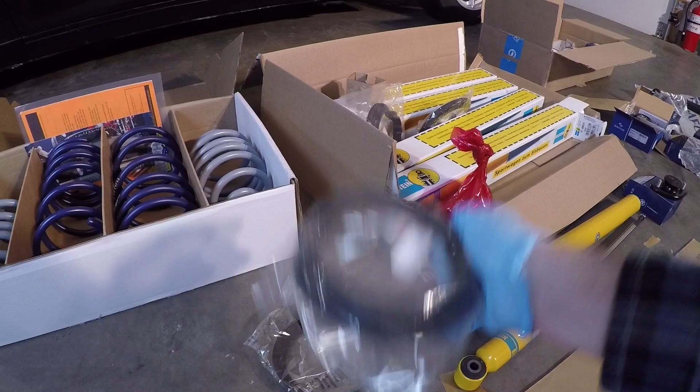Down here we have brand new Bilstein shocks - these are the B8 shock absorbers and strut cartridges for the BMW E30, for if you're lowering your car at all. So even though I'm just dropping it an inch, I'm still going to put the lowered style struts and shocks on this car. That's because when you have a lower spring, your shock absorber needs a shorter breadth of dampening range. The shafts here are actually shorter than stock, which means when you raise the car, the suspension droop won't be nearly as much.

Now these are pretty high quality struts. Altogether for the kit it was about $460 or something like that. So it's not cheap, but hopefully they'll last a long time. Not only will they ride better than what's currently in there, but they'll also look great when you take a look under the car. Moving down the line here, these are the top shock mounts for the rear shocks.

These bolt into the rear wheel well. I've also got a shock mount reinforcement kit from ECS Tuning. It consists of an aluminum brace that goes on the top side of this mount so it prevents flexing of the wheel well where this mounts, potentially reducing the cracking that might occur should you encounter a huge bump or something like that.

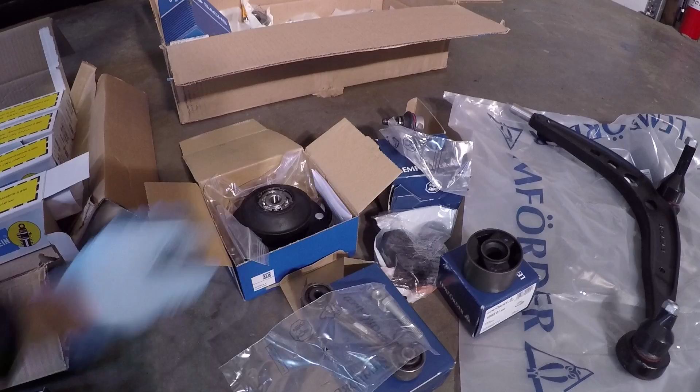All right, moving further down the line, we've got firstly in this box a new strut hat for the top. The strut goes through the middle of this, and when you turn the steering wheel, that strut turns as well, allowed to do that because of this bearing at the top of the strut mount. It would go into the car like this, and you see those three nuts when you open the hood - that's what this piece is.

This is isolated with a rubber piece inside, so if you ever go over a bump and hear some nasty rattling coming from the front suspension, often it's something wrong with this piece. So we're going to swap that out for new.

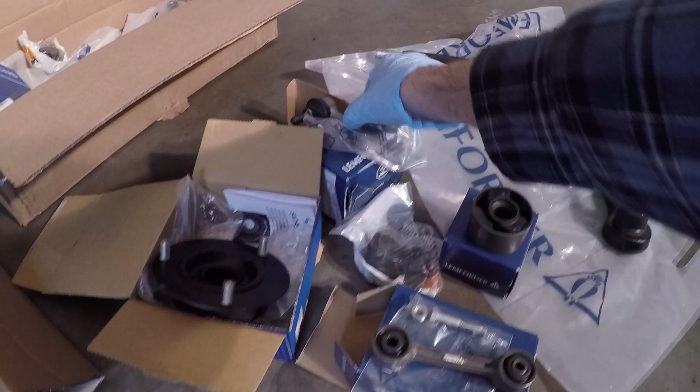I've also got new sway bar links for the front and rear - this is a rear sway bar link, and then the front sway bar links. We're going to swap these out. I've also got new sway bar bushings for the front here, and new control arm bushings for the lollipops - I'll have to press out the old ones and press in the new ones into those metal lollipops. Lastly, over here we have brand new control arms with new ball joints for the inner and outer.

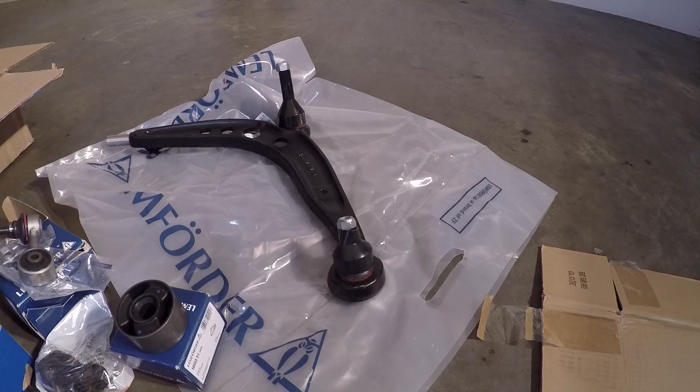I don't know that anything's actually wrong with the ones currently in the car, but since I'm putting all these new parts in, it might be foolish not to go ahead and replace those too, just to make sure everything is fresh and ready to go. So that's a summary of all the parts we'll be dealing with on today's video.

Before I jack the car up and start swapping out parts, I want to measure how low the car is right now so we have a baseline for when the new springs are put in, so we can see how much the car was lowered. Let's start taking some measurements with a tape measure.

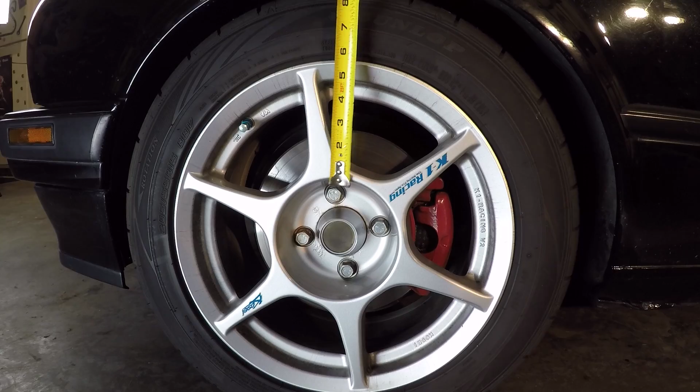We're going to find two reference points to measure from. We don't care about ground clearance, that's not what we're measuring. We're creating a baseline from two reference points so we can capture the distance with the old springs, and then compare that to the distance with the new springs. The two reference points are the inner portion of the wheel compared to an approximate perpendicular position along the wheel well, roughly centered. We're just getting an estimate here. That's 9 5/8 inches between those two reference points.

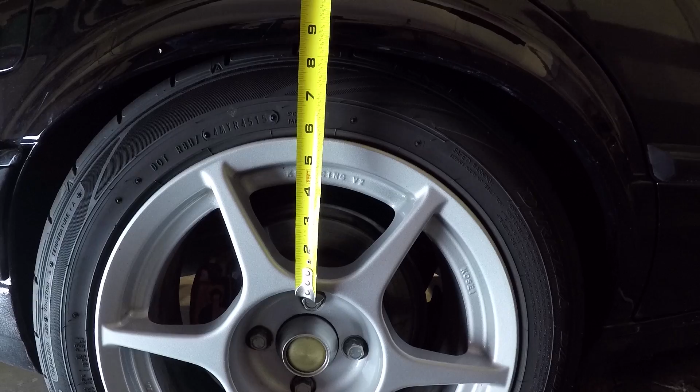I'm going to write that down on a piece of paper so I can remember it and reference it when I go back to install the new springs. Now let's move around the rest of the car. That's 8 1/4 for that wheel arch. That gives us 8 1/2 inches. So we can already tell between the left and right side on the rear, we've got a 1/4 inch difference — the left side is drooping a 1/4 inch more than the right side. And lastly, that's 9 7/8 right there.

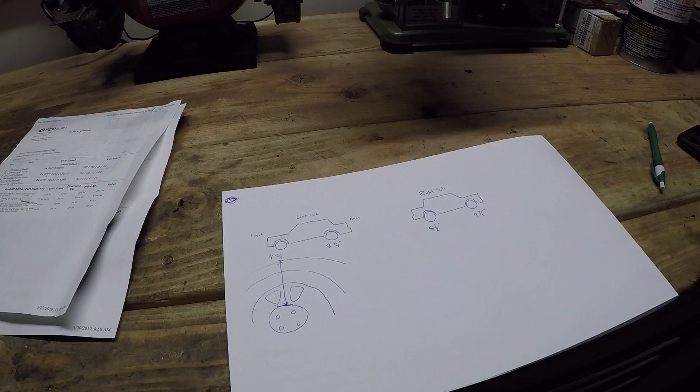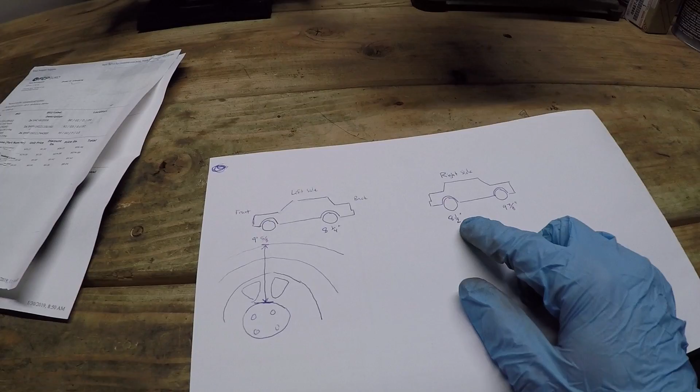With our measurements taken, I've made a diagram to document these measurements and compare them against the new measurements with the new springs. On the left side we have 9 5/8 inch for the front and 8 1/4 for the rear. On the right side we have 9 7/8 for the front and 8 1/2 for the rear. So the left side, front and rear, is a 1/4 inch lower than the right side.

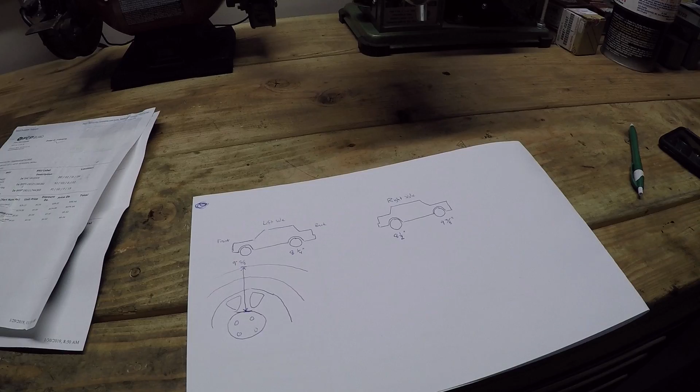I assume this is attributed to the driver always being on the left side, so the left side springs took more wear than the right side. At least that's my hypothesis. What I really hope I don't find is that when I install the new springs, this 1/4 inch difference still exists. But we're going to find out once the new parts are in there.

With our baseline measurements taken, it's now time to start taking the old parts off and putting the new ones in. We'll start with the front end of the car, just because it's more difficult — if I run into anything wrong, it's going to be at the front end. So let's just take it on and get done with it. Let's get to it.

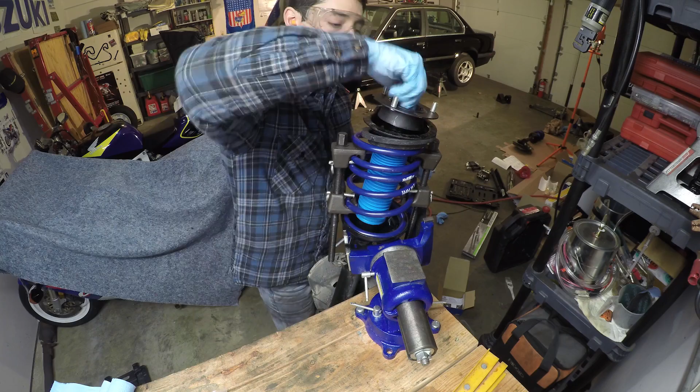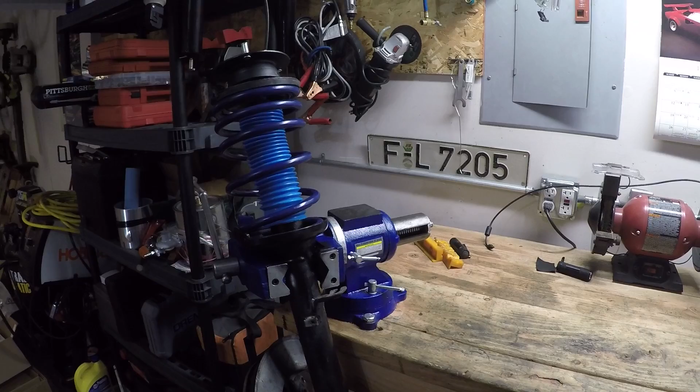I just finished putting together the final strut and I came across an unfortunate problem. Let's take a look. Here's the final strut, completely assembled, with all the components tightened down and ready to go. But as I was getting to remove this thing from the vise, I found something very unfortunate.

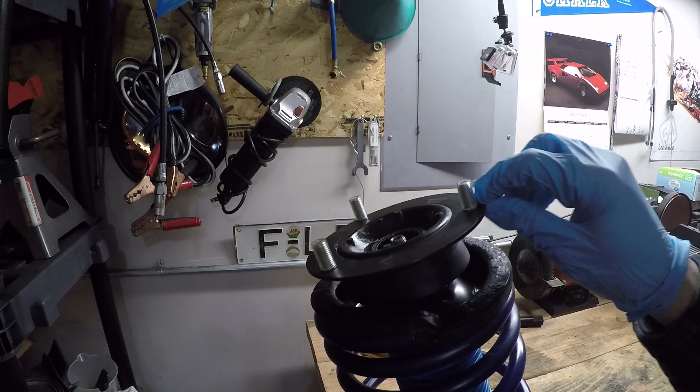It has to do with the new strut hat right here, the strut mount. Inside of this is a bearing that allows the whole strut assembly to turn when you turn the steering wheel. It's supposed to be a very tight assembly with no play other than the ability to rotate. But if you take a look at this, you can see I can wiggle this fore and aft, and even in the Z-axis up and down. The whole point of replacing this assembly is to get rid of all that play, because this sort of play translates into rattles and knocks that you hear from the front end.

This is a brand new part, and I'm very disappointed that it's worse than the old one I took out. This is made by Sachs, and I thought that was a reputable company. The first one I put in was tight as a drum — it didn't have any of this problem. But here I am, I'm going to have to remove this and order a new one. Of course, now I've got to wait a week at least to get the new one in.

I'm just very disappointed because everything's ready to go, but I can't put this thing back in here with this part like that. So all I have to do is order a new one and wait a bit. But even though I can't put this strut back in the car, I can attack the control arms and renew the bushings on those lollipops and all that, so I will do that instead. With that bit of unfortunate news, let's go ahead and start in on redoing the control arms.

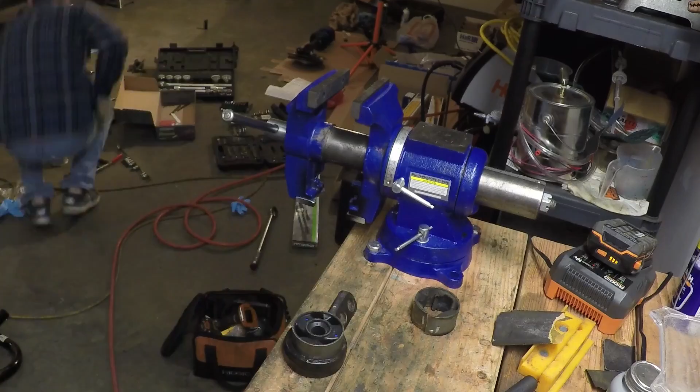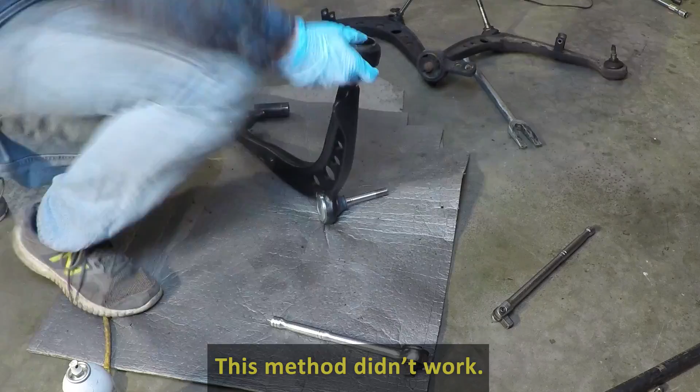So let's take a break real quick. I've had a bit of trouble trying to install these lollipop bushings for the front control arms. I actually, in the end, had to make up my own special tool to even get these things onto the control arms. Let's take a look.

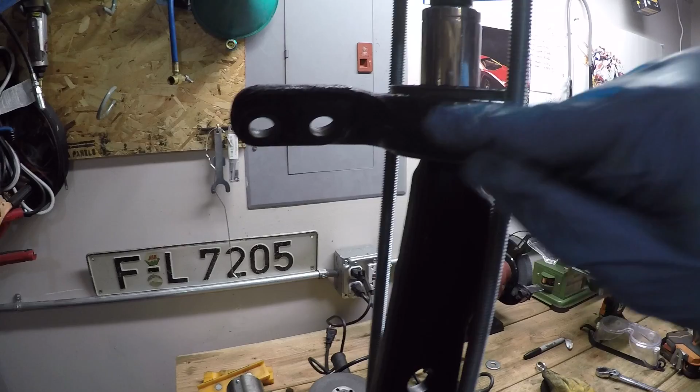Okay, so the first hurdle was actually installing the bushings into the lollipop. To get the old bushings out, I just took a hacksaw and cut the outer steel perimeter and just banged it through with a hammer.

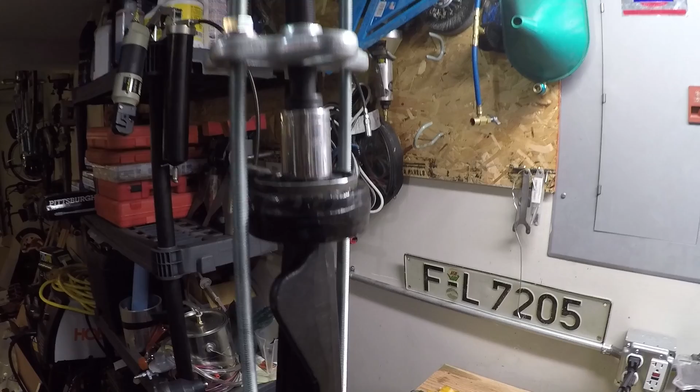So once the old bushings were out of the lollipops, to put the new ones in, I kind of defaulted to caveman type techniques where I just had a PVC pipe that was the same diameter as the lollipop, and then I used a socket that was the same diameter as the metal bushing and just used a hammer to basically press it in. In a perfect scenario, you would have a hydraulic press that would just push these in, but of course not everybody has those, especially not in your home workshop. So you can get these in there using just kind of a hammer and a socket.

But the second layer of difficulty came when actually pressing these new bushings onto the control arm. I tried at first trying to use a hammer and a socket to get these things on there. Of course, that simply didn't work. I've heard people having luck doing that sort of thing, but I just couldn't get that thing on there.

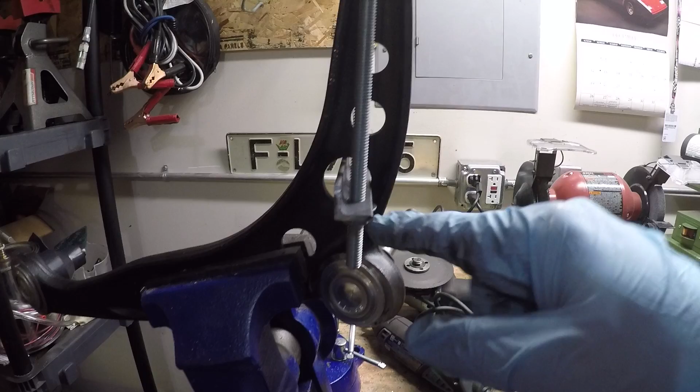So ultimately, I found this tip online of constructing your own press type mechanism. This press type mechanism actually uses a gear puller, which I already had, and then some 3/8 diameter all-thread, and then a 3/4 inch angle iron piece, which I've cut down to about 5 inches right here. So all I did was drill 2 holes for the 3/8 all-thread to pass through, put some nuts on the bottom, then put some nut securing on the top, and then I put a 19mm socket that goes on this inner steel portion of this bushing, and then I just began ratcheting this down, and it pressed this bushing downward onto the control arm, and that worked.

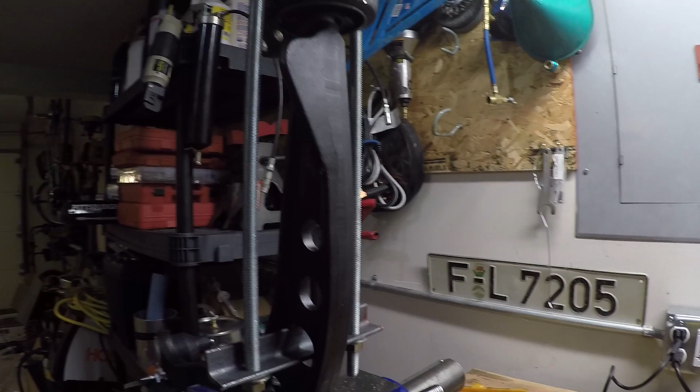Now that I know how to do this, I can just apply that to the other control arm and probably have it done in less than 30 minutes. So save yourself a lot of time—just go out and buy this stuff and make this press.

So this is my first time ever installing these lollipop style bushings onto BMW lower control arms, and these are the things you just learn as you go. So now I know, and now I have this special tool, so if I ever need to do this again, it's ready to go. All right, so let's do the other side.

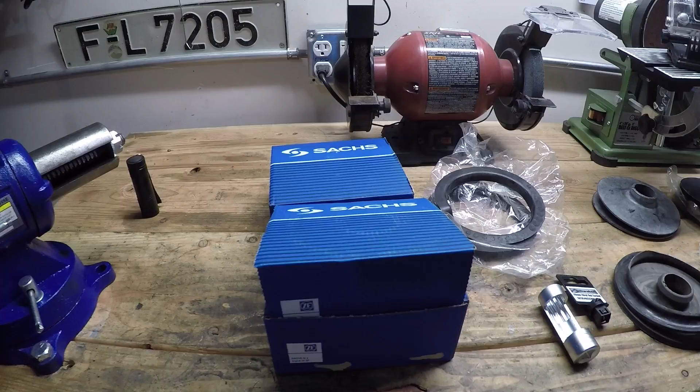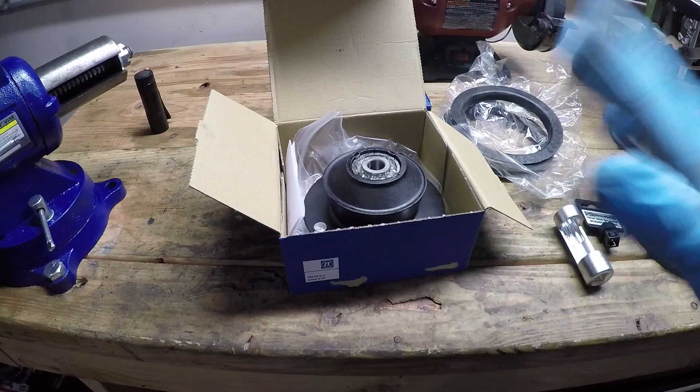All right, so the first thing we have here are 2 new strut mounts. I only had one that was defective, but I went ahead and ordered 2 more just in case the 50% defective rate continued. I've actually opened one of these boxes up already and looked at the strut mount, and the bearing in the middle of this is super tight. So I'm hoping installing this will be good and we won't have to open that second box—I can just send that back.

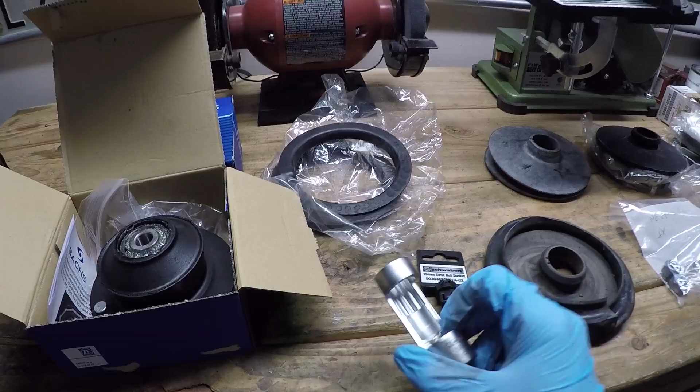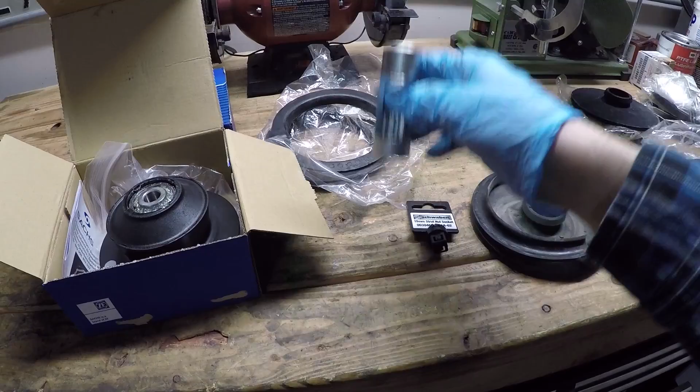Now, while I was ordering parts, I went ahead and ordered a few extra things. The first thing over here is a special socket made by Schwaben. It's a 19mm one, and this is how you can actually tighten that top nut on the strut mount. As you can see, it has a cutout slot here where you can insert an Allen key to keep the inner portion of the strut stationary while you turn the nut and torque it to specification. Now, I wasn't using this before, I didn't have this tool, but now that I have it, I will now be able to apply the proper torque, which I think is 46 or 47 foot-pounds, I'll have to look. But anyway, now that I have this, I can now tighten that top nut to the proper specification. Again, it's made by Schwaben, and I'll put a link to it in the description of this video.

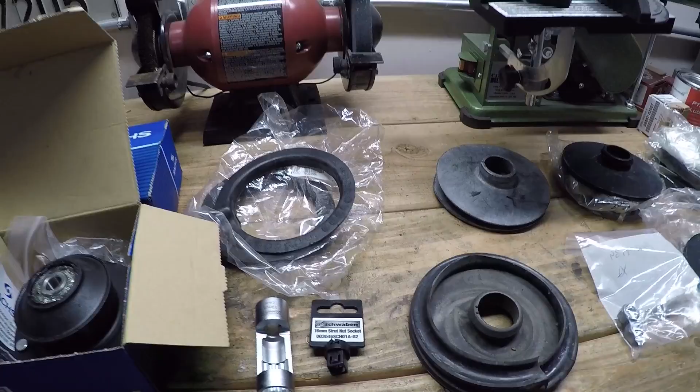Now, moving down the line here, we'll see that we have various pieces of rubber spacers. These are OEM BMW parts. BMW makes 2 sizes of the top front spring cushions. The ones I installed on the shocks already are actually a thicker 9mm one, but the ones I took off of the car were these thinner 3mm ones. I didn't even realize there was a difference until I started taking them apart.

So what I'll do, since I've got to reinstall a new strut mount anyways, I'll probably swap out for these thinner 3mm ones so that it matches the ones I took off. The difference between these is 6mm. These are the 3mm, the ones I installed on there are 9mm.

What you have to understand is that there's not a simple ride height difference of 6mm between these two. What we're actually doing is applying preload to that spring, meaning we're increasing compression on it. So when the car drops down, you might see a ride height increase of more than 6mm just because that spring has more preload.

So I'm hoping that when we put the original size back in, we'll get the front and rear leveled out, because I've also ordered new rear spring pads. If you remember in my previous videos when I changed out the rear subframe bushings, I installed pucks under the rear springs to help increase the ride height.

While it did increase the ride height a little bit, it wasn't enough. So in this video, I'm hoping to increase that ride height a lot by putting new springs in. Since I'm doing that, I'm just gonna put the original size rear spring pads back in. I can't reuse the old ones because they've compressed quite a bit where the coil rests on the spring pad — probably lost 2 to 3mm alone just because it's old.

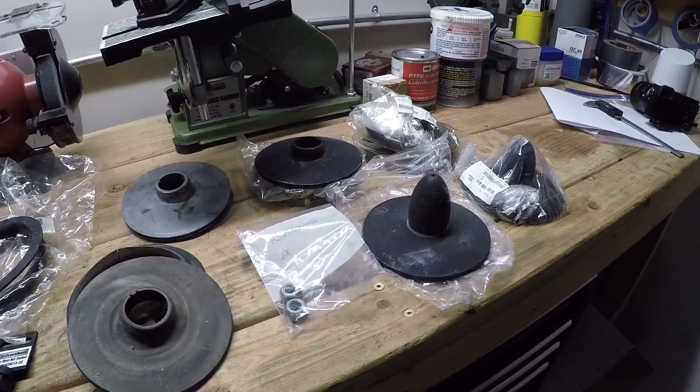Now, to save time, I've gone ahead and ordered the other spring pad thicknesses that BMW offers. We have 5mm here, and 10mm here, depending on what the ultimate ride height looks like with our baseline original spring pads. So if it's too high, I'll install the 5mm ones, and if it's too low, I'll go in and install the 10mm ones.

We'll just have to wait and see. But I went ahead and bought all these things because I don't want to have to wait and get them in if I find out I need them in the future.

All right, with the new parts reviewed, let's go ahead and swap out that front strut mount and also put in those new top spring pads. Let's get to it.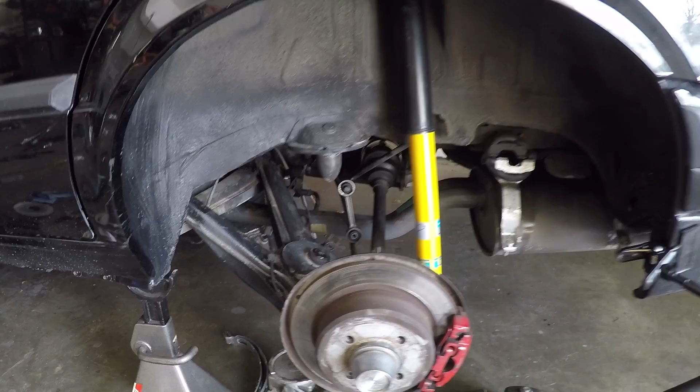All right, I'm gonna pause for an update. Unfortunately, I can't fit the new springs into the same gap that I pulled the old springs out of. Let's take a look. So right here, I've unbolted the shock absorber and the sway bar link and undone the exhaust a little bit to allow the swing arm to fully extend downward, which with the old spring was enough clearance to pull it out.

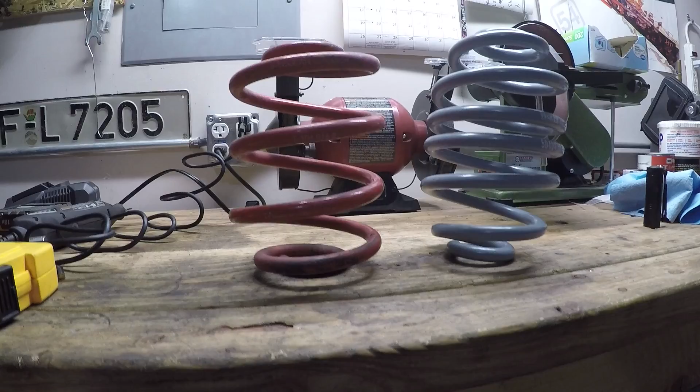But now that I've got these new spring pads in here and the new springs are a little bit taller, I can't actually fit them in. Let's go over to the bench and see how the old springs compare to the new ones. So the old spring is at least 2 inches shorter than the new spring right here. I don't know if the old spring started off that short or if over time it collapsed to that compressed size, but either way, I can't fit this new spring in there like I could the old spring.

So to work with this newfound issue, I'm gonna have to cant the subframe downward. I'll do that by undoing the bolt that holds the back half of the differential in place. Once that bolt's out of the way, the whole subframe should swing downward, meaning the trailing arms will come down, giving me that extra 2 or so inches of clearance I need to get the new springs in.

So before I do that, I'll have to undo the passenger side of the car — the shock absorber, sway bar link, and all of that — so that the whole assembly can come downward. Let's get to it.

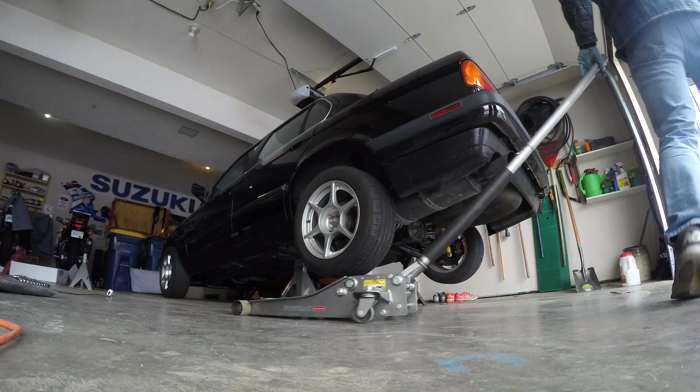So that took a long time, but I gotta say, it's completely finished now. New springs, new struts, new shocks, new sway bar links, new control arms and bushings installed, and this car is now completely overhauled when it comes to suspension.

There is one step remaining in this whole job, and that is to do a 4-wheel alignment on this car. Now, anyone familiar with E30s might be thinking, what are you talking about, 4-wheel alignment? You can only adjust the front wheels, and only the toe at that.

The previous owner of this car installed polyurethane eccentric bushings in the rear trailing arms, meaning that toe and camber can be adjusted a little bit. That's not something I can do myself. I'll need to take this to a professional alignment shop with laser alignment so I can get it dialed in just right, so the car handles well and predictable and everything's good to go.

Even though it needs an alignment, I wish I could take it out on the street and see how much quieter it is now that it's a little bit higher off the ground and has new shocks, struts, and new bushings in it. Unfortunately I can't, because the weather's absolute crap right now.

So even though I can't go drive it, let's take a look at the visual improvements we see already. Without question, the car sits much higher. In the back, you can actually see the top of the tire now, where before it was hidden beneath the wheel well. From the side, you'll notice a considerable amount of negative camber has been removed in the rear, and on the front you can see it's been increased quite a bit as well.

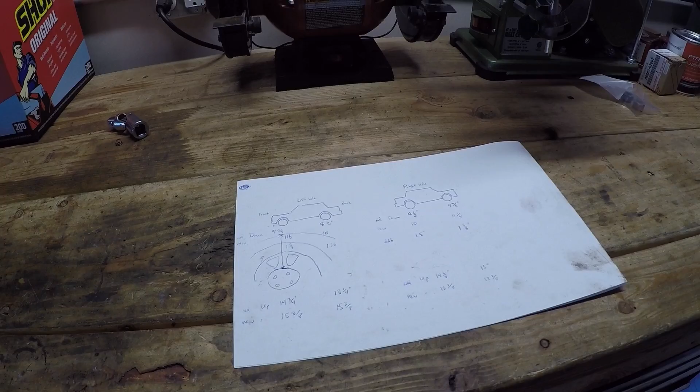If you remember at the beginning of the video, I took a measurement of the distance between this part of the wheel to the top of the fender on all four corners, and I've gone back and remeasured everything. Let's take a look at my diagram to see what's changed. This diagram's kind of muddied up and hard to read, but we can still discern what's going on here.

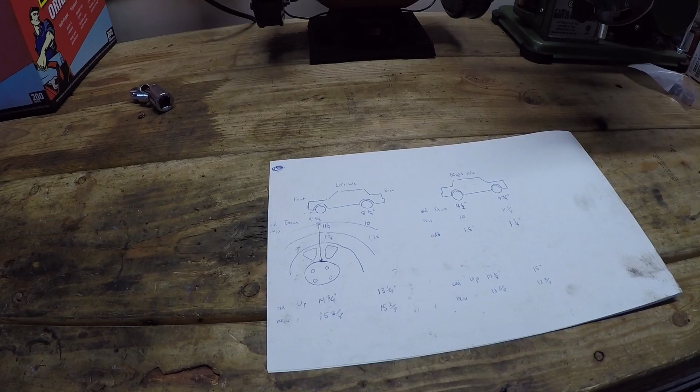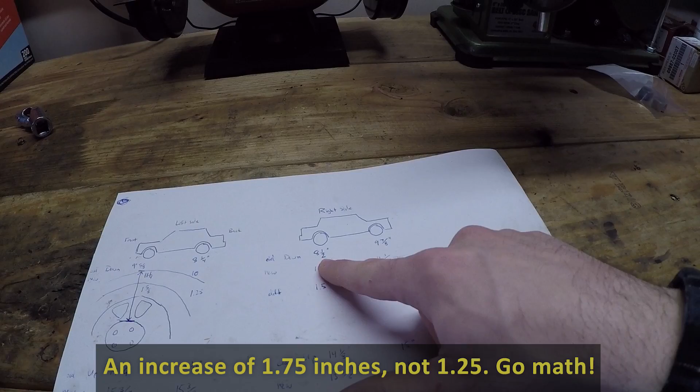Our first measurement for the front left side was 9 5/8 inches from the center point of the wheel to the top of the wheel arch. The new measurement is 11 1/4 inches, a difference of 1 5/8 inches higher than before. On the left rear, it was 8 1/4, now an even 10 inches, an increase of 1 3/4 inches. On the right rear, we had 8 1/2 inches, now 10 inches. And at the front right, we had 9 7/8 inches, now it sits at 11 1/4.

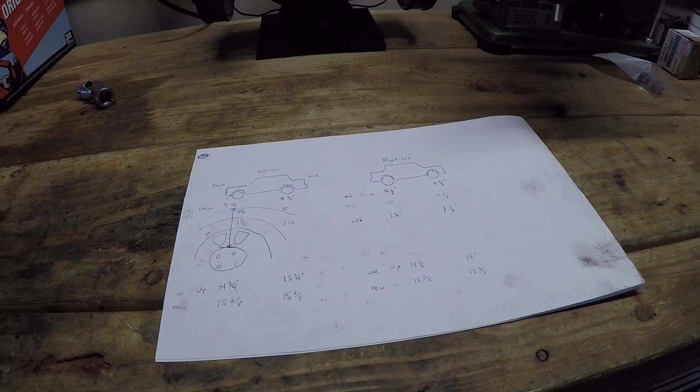So as you can see, the new measurements match exactly from left to right, front to rear. In the front, both sides measure 11 1/4, and in the rear, both sides measure 10 inches. Overall that's an increase in ride height of about 1 1/2 inches on all four corners. The most important part is it's higher, and now it's level from left to right. That's a huge improvement, and I'm very happy about that.

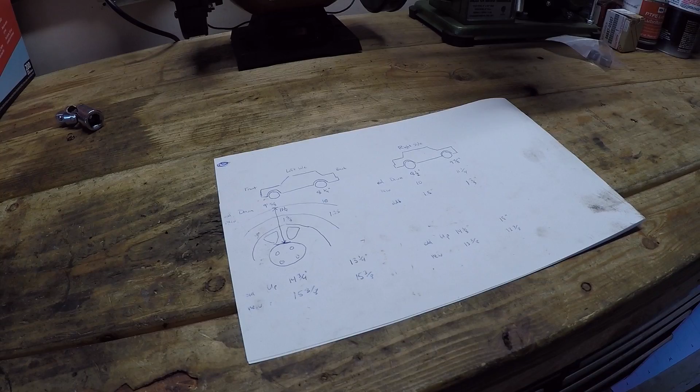It was a little difficult to nail down the specifications of the spring pads, springs, and shock absorbers, and what all can fit together to get a leveled out car. I spent all that time and money figuring that out, so I'll put links to all those parts in the description so you don't have to do the research yourself. You can just click on those things, buy them, get them on your car, and you'll be happy with the results.

So as you can see, the car overall is sitting level. There's no extreme rake towards the front end, which I've seen a lot of E30s have. This car is sitting pretty flat, so quite a result there.

I won't lie, this was kind of an expensive project. We're knocking on the door of about $1,400 with all the parts I ordered originally, plus the extra parts and tools I had to order to complete the job. But if you want to do it right, you gotta spend money in this game. The alignment could easily be another $100 to $200, so all in we're looking at probably $1,500 to $1,600 to completely redo the suspension on one of these cars. I could have done it cheaper—I could have skipped the Bilstein shocks and used standard style ones—but if I'm gonna go in there, I might as well put the nice stuff in.